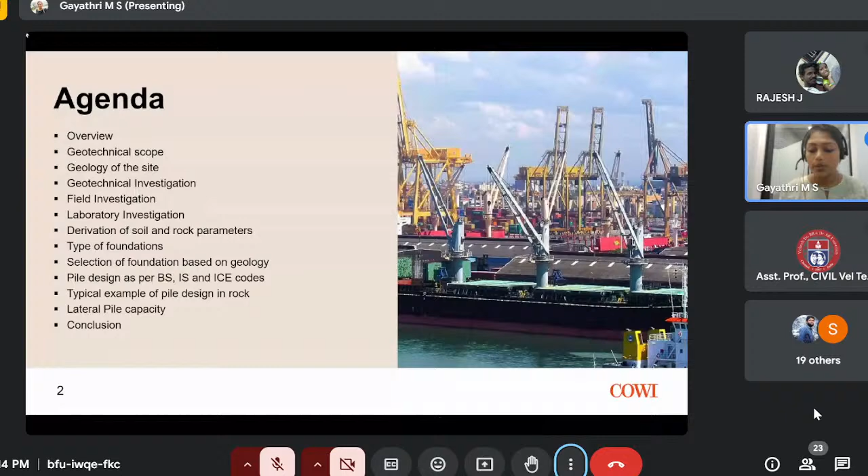Now we will have an overview of the project. This was an expansion of the Colombo Port. I worked on the West Container Terminal. The scope was to develop the container berth and associated marine works. The geotechnical investigation was conducted at selected locations to identify the subsoil condition. There were 15 boreholes: one was onshore, and 14 were offshore. The total length of the container terminal was 1,400 meters, out of which the container berth was 600 meters, and the rest 800 meters consisted of the long berthing structure along with the closing structures at the northern and southern sides. On the right, you can see the location of the boreholes conducted. This is the land borehole, and all these 14 boreholes are offshore boreholes.

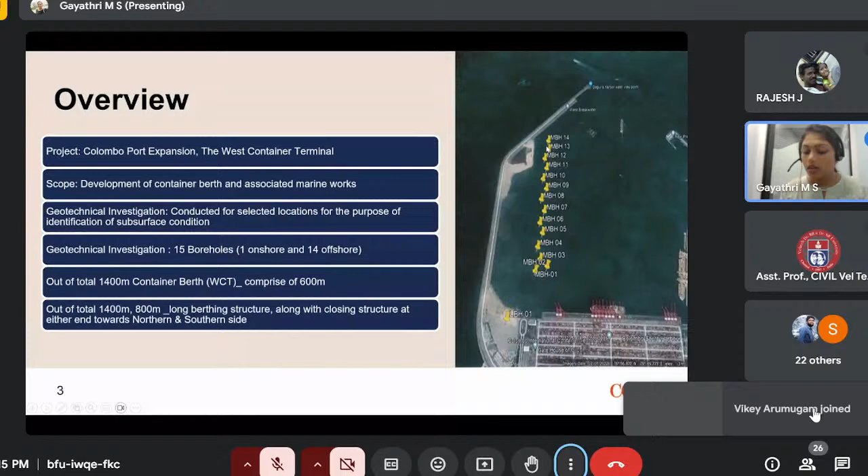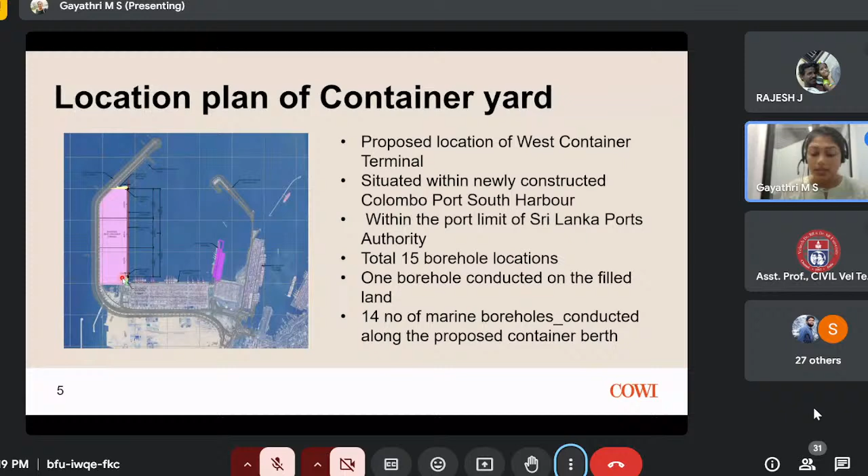Now we will come to the geotechnical scope. Initially, when starting work, we have a desk study - what data is available, what existing data is available. We study that and understand the geological conditions and previous designs, so we get an overall idea of the area, geology, and geotechnical investigation report. After the desk study, if we feel the number of boreholes conducted is less, we can propose additional boreholes. Once that is conducted, we receive the geotechnical investigation report, which contains the summary of all the laboratory and field data conducted, and all the borehole locations, everything.

It is a detailed report of the investigation done. From the investigation report, we will prepare a geotechnical interpretative report, which will be a summary of the investigation done, and from the summary we will interpret some data and derive some parameters useful for the design.

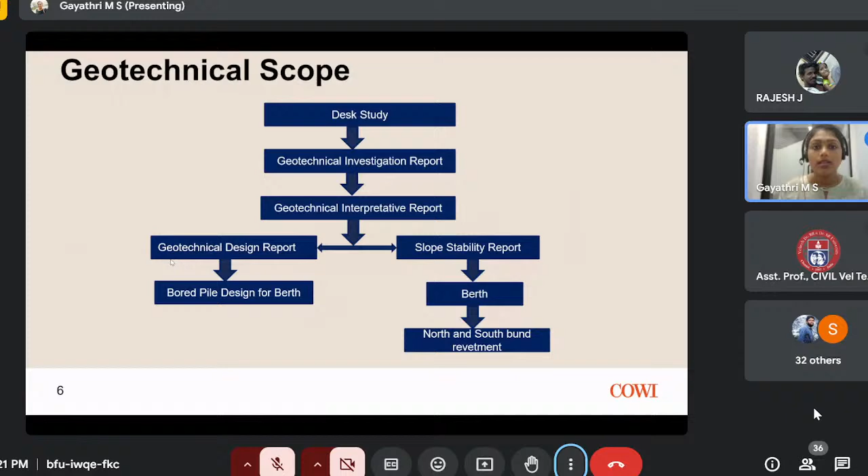So we will go in detail with the pile design in the coming slides. Now the geology of the site.

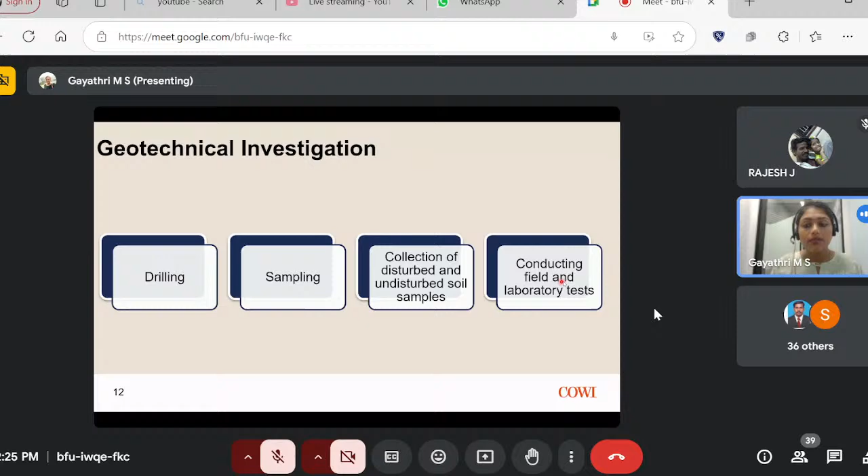Now, geotechnical investigation. We will see in detail what geotechnical investigation is and what they are doing in that. There will be drilling, sampling, and collection of the disturbed and undisturbed soil and rock samples, and conducting field and laboratory tests of the samples collected.

Coming to field investigation: the boreholes are advanced using a rotary drilling machine, and the drilling was carried out using overburden cutting tools, with the wash boring process used to remove the cuttings from the bottom of the borehole. The disturbed samples were taken at the corresponding depths where SPTs are done, and undisturbed samples are collected where cohesive soils are available or where N values are less than or equal to 6.

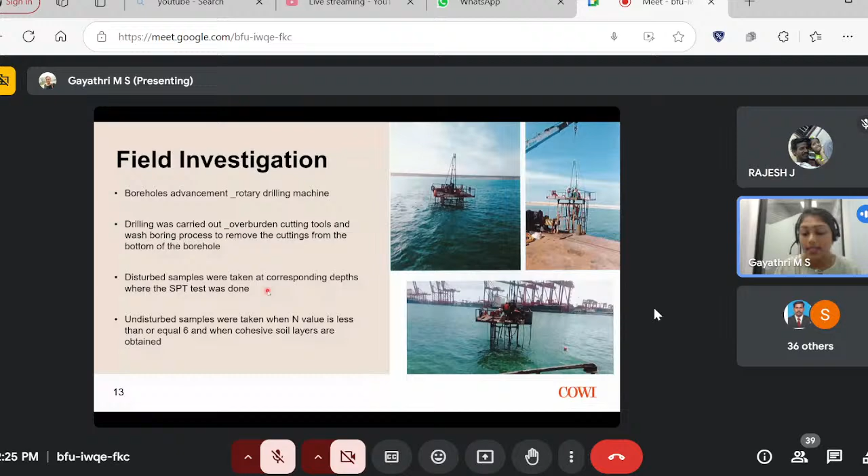Now the standard penetration test is done based on BS 1377. Since this is an international project, all the codes used for the design are based on Euro codes. Either the country's own codes or Euro codes, we follow.

The disturbed samples of soil were collected both from the SPT tube and cuttings collected from the washings. Triple tube core barrels were used for drilling in hard rock, and the rock cores were evaluated at the site using visual observations and CR and RQD parameters, which we will discuss in detail later.

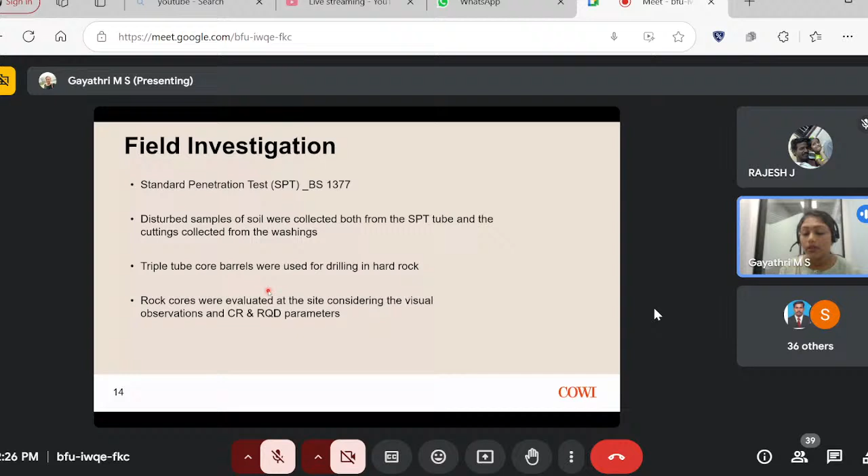Standard penetration test - I hope all of you know about the standard penetration test. The number of blows of the hammer required to drive each 150 mm will be counted. Each SPT N value will be the number of blows required for 300 mm penetration beyond a seating of 150 mm.

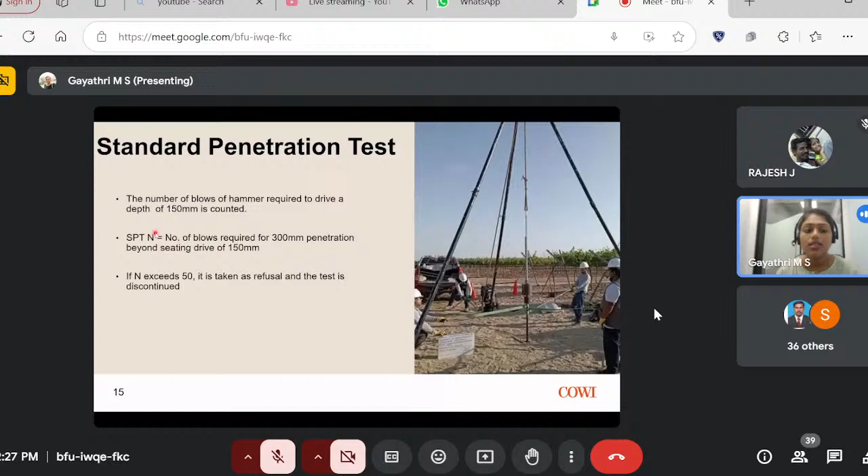If the SPT N value exceeds 50, it is considered a refusal and the test will be discontinued.

On the right side you can see the setup and the idea of SPT. Once the drilling is done to the desired depth, the drilling tool will be removed and the sampler will be placed inside the borehole. The standard split spoon sampler is used. The outer diameter of the sampler is 50 mm, the weight of the drop hammer is 63.5 kg, and the freefall height is 760 mm.

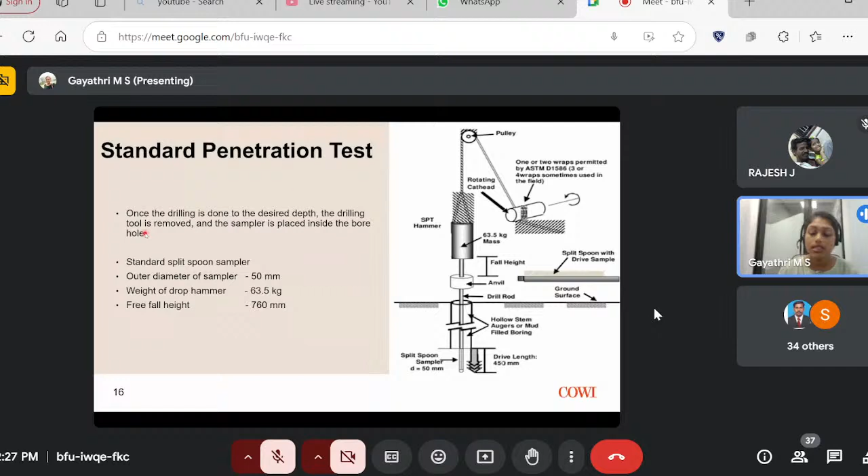Now, field bore log - most of you will be aware, I guess. It is a detailed record of the conditions and data gathered during the geotechnical exploration. This is created by recording the in situ ground conditions encountered in a borehole, done by visually inspecting the samples brought to the surface. A bore log will contain soil types, the water table, soil consistency, cohesive or non-cohesive nature, and permeability - all the data will be available in the field bore log.

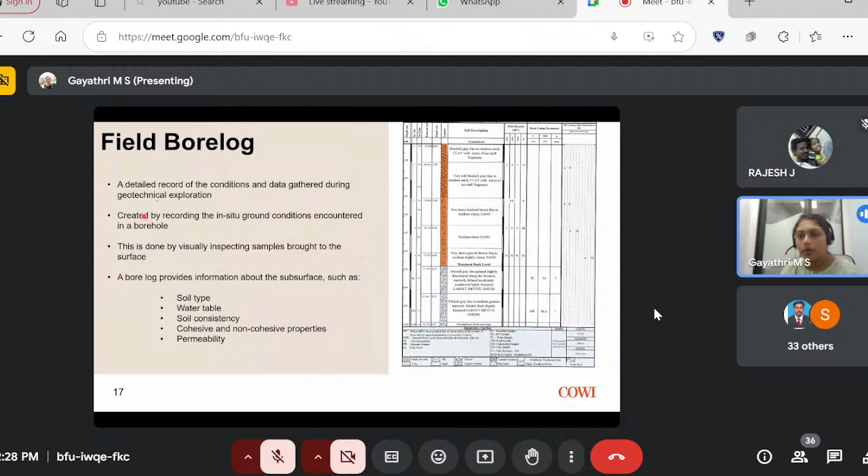Now this is a typical field bore log. I thought it would be helpful for you to understand how it actually looks like. It will have depth, all the depths, the elevations, all the soil descriptions, SPT N values. For soil, it will be SPT N values; in case of rock, it will be CR and RQD. So all the data will be available in the bore log.

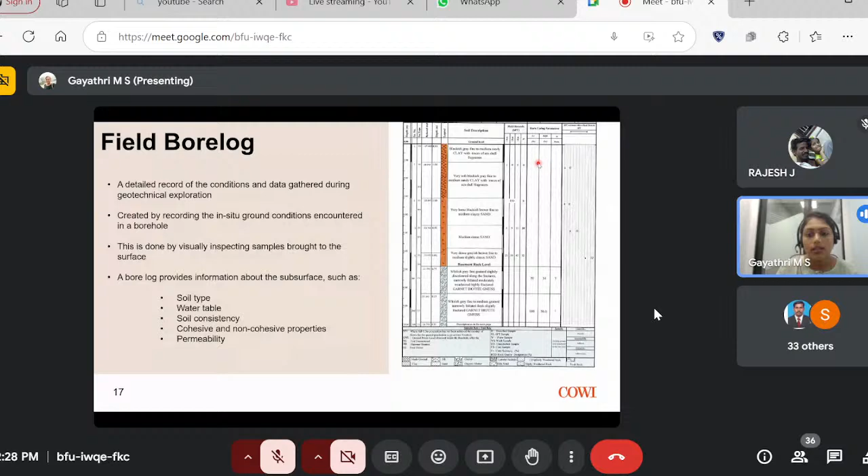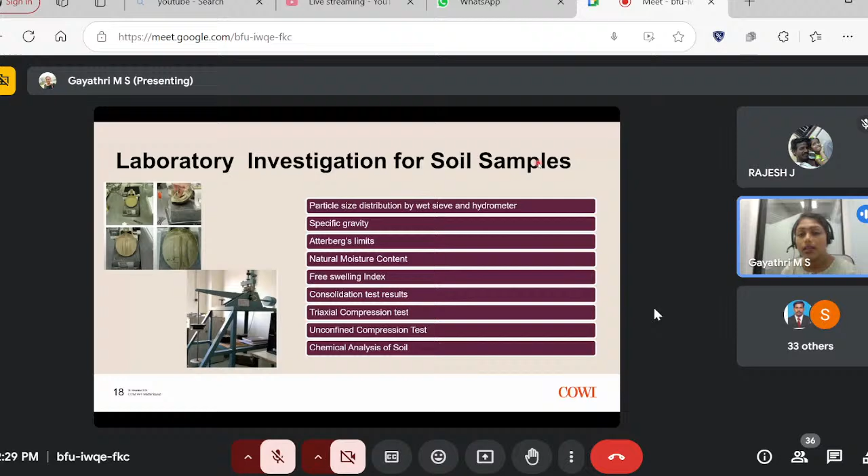Now, laboratory investigation for soil samples. What are the tests available for soil? These are particle size distribution, specific gravity, Atterberg limits, natural moisture content, free swelling index, consolidation test results, triaxial, unconfined compression test, and chemical analysis of soil.

Now, on rock samples, we have uniaxial compressive strength test, point load test, modulus of elasticity, porosity, specific gravity, and water absorption. This is a typical laboratory test result in which both soil and rock laboratory test results are available.

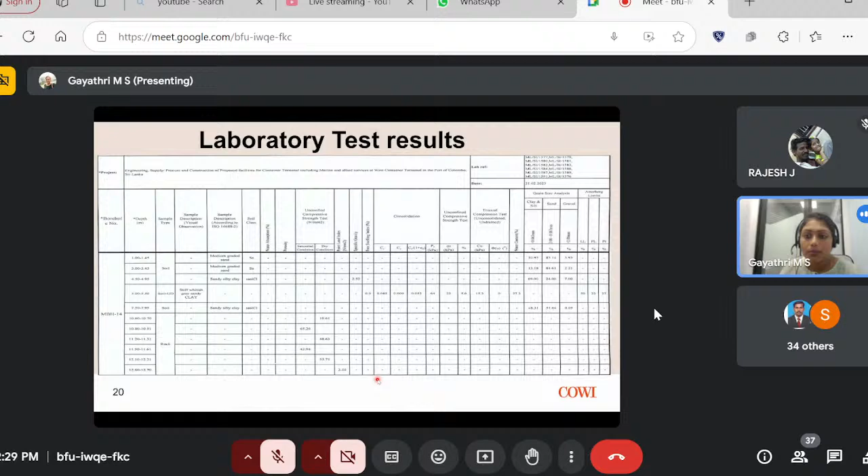So there is a grain size analysis, Atterberg limits for the clay soil, and the consolidation and other triaxial test results for the clay soil if available. In case of rock, we have UCS values, and sometimes other parameters also will be available, depending on the project.

Now we have gone through the geotechnical investigation. If we have the investigation report, as I told, we will prepare a geotechnical interpretative report. The main idea of the report is to come to the design parameters, to derive the design parameters. So, what are the design parameters?

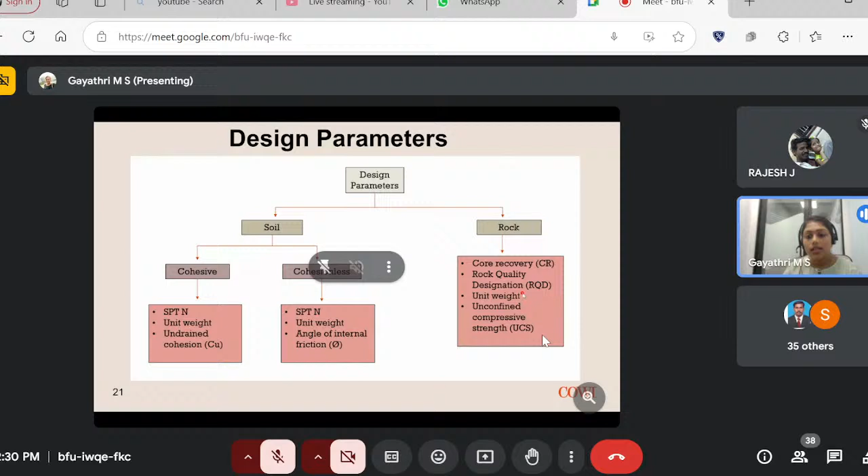We have both soil and rock. So what are the concerned design parameters for soil and rock? Soil has both cohesive and cohesionless soils. For cohesive soils: SPTN, unit weight, and undrained cohesion. For cohesionless soils: SPTN, unit weight, and angle of internal friction. In case of rock, it will be core recovery, then rock quality designation (RQD), unit weight, and unconfined compressive strength (UCS).

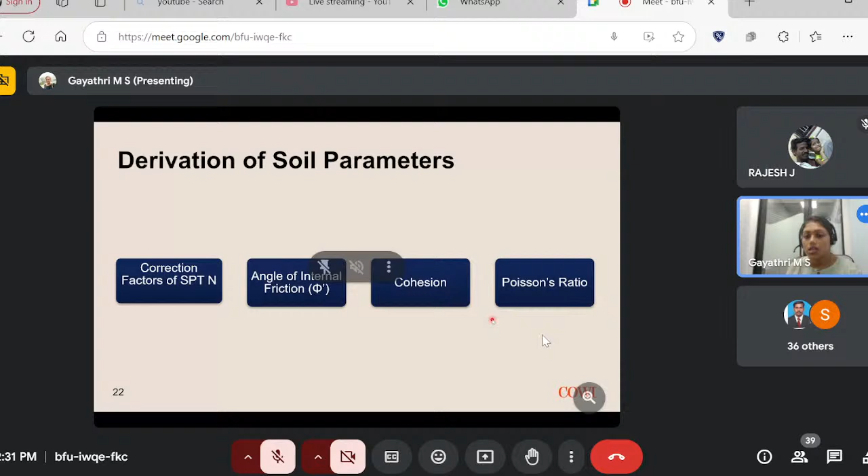Now, how to derive these soil parameters? First of all, we have the SPT, so the correction factors for SPTN, then angle of internal friction, cohesion, then Poisson's ratio. We will go one by one.

Correction factors for SPTN: this is as per J.E. Bowles. You can find the same in IS 1983 also. So we have two correction equations given. The N160 is for sands, mainly the penetration resistance corrected for both rod energy and for overburden pressure also. This overburden pressure correction will only be conducted for sand.

If it is clay, this overburden pressure correction is not required. So the N measured is the SPTN value measured at the site. Then CN will be the overburden pressure correction, which is used to calculate this equation. Then effective overburden pressure P naught. CE is the correction factor for energy. CB will be correction factor for borehole diameter. This is correction factor for sampling method, and CR is the correction factor for rod length.

Now the correction factors, what are the correction factors and their values? Everything is tabled here. You can find it in the textbook or the code that I have mentioned.

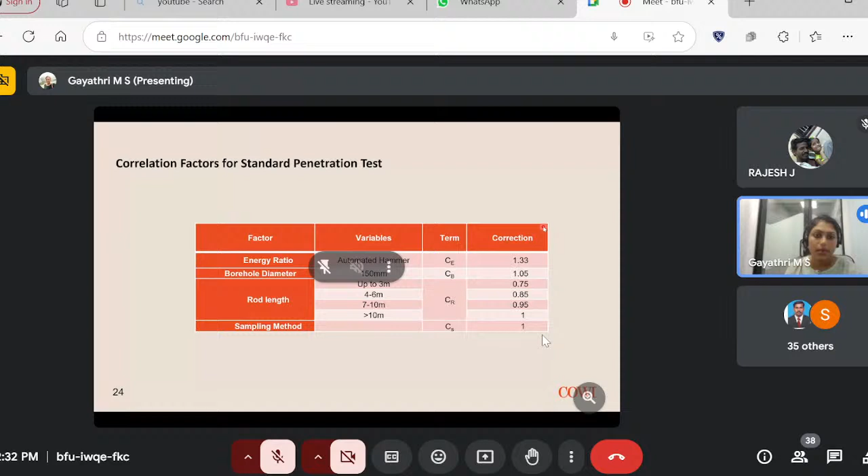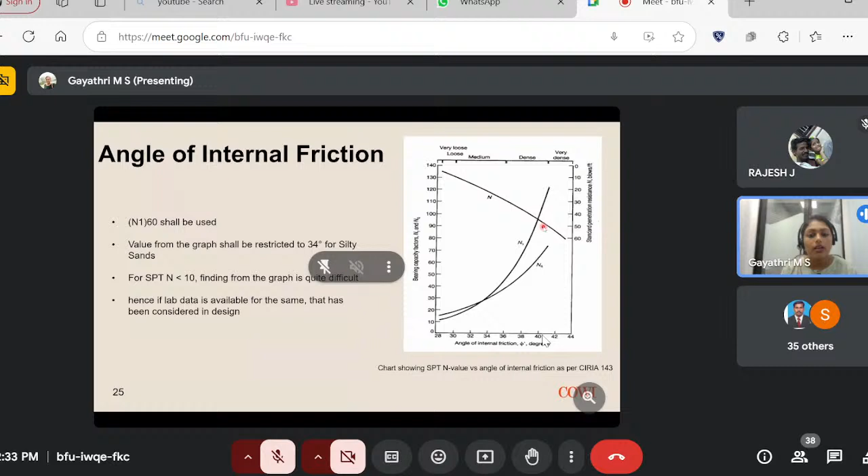Now the next one is angle of internal friction. To derive the angle of internal friction, which is a cohesionless soil property, N160 is used. The values available from the graph will be restricted to 34 degrees for silty sands. This is based on past experience and past projects in the same similar region. Based on that, we have come to that conclusion. For SPTN less than 10, it is difficult to find it from the graph. Hence, if lab data is available for the same, that can be considered in the design.

Now, next is cohesion. This undrained shear strength is derived based on the corrected SPT value. Here we will use N60. We don't need overburden pressure correction here. So as per CIRIA report 143, CU will be 5 times the N60. Whenever lab data are available, the same can be considered for the design.

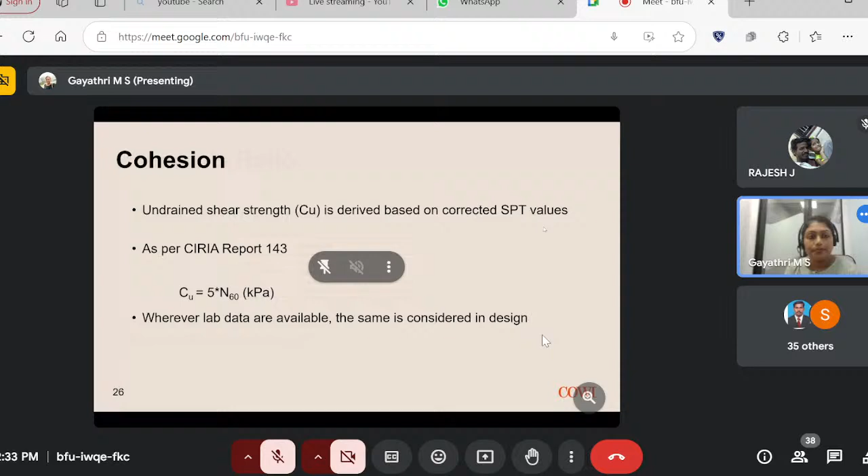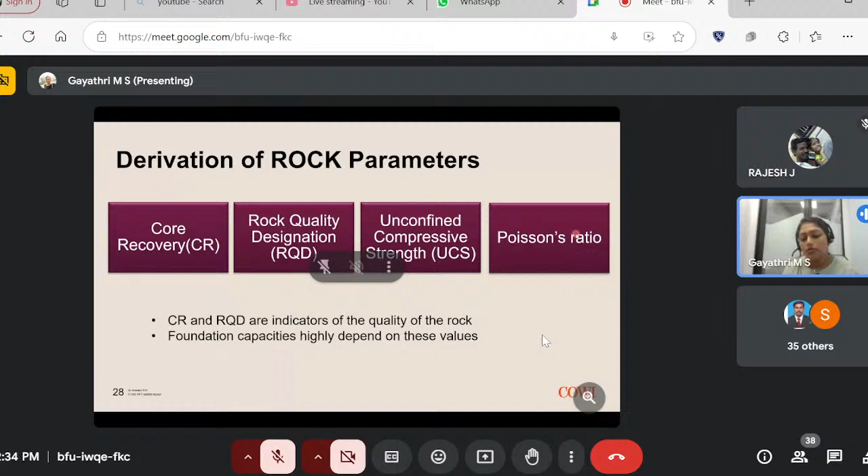Now, derivation of the rock parameters. The parameters are core recovery, rock quality designation, unconfined compressive strength, Poisson's ratio. This is CR and RQD. These are the indicators of the quality of rock, and foundation capacity is highly dependent on these values, which are very important for the design.

Now, what is core recovery? Core recovery is the percentage of the drilled rock that is recovered as a core in rock core drilling. It is calculated by dividing the length of the recovered core by the total length of the core run. Core recovery is also an indication of the condition of the rock. Low core recovery indicates poor rock quality, while a consistent core recovery of 100% indicates good quality rock.

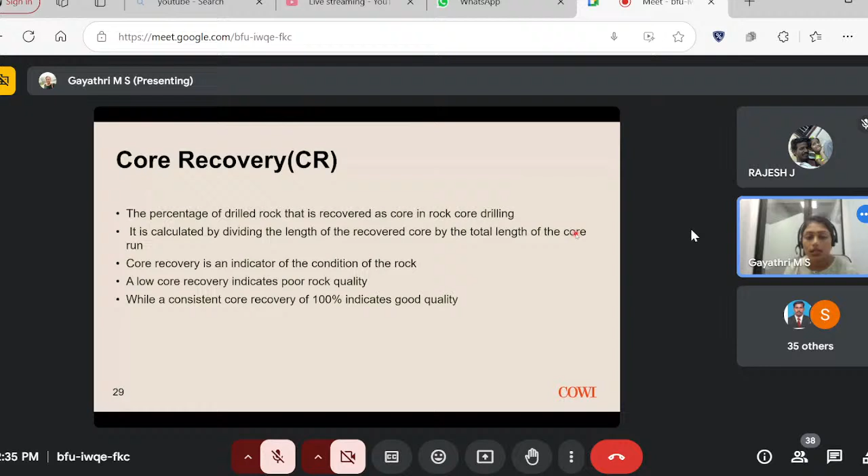Rock quality designation, RQD, is the percentage of drill core pieces which are longer than 10 centimeters in length, measured along the center line of the core. RQD is used to assess the quality and integrity of the rock mass, and is a rough measure of the degree of jointing and fracture in the rock mass. If RQD is more than 75%, it is a high quality rock, and if it is less than 50%, it is a low quality rock generally.

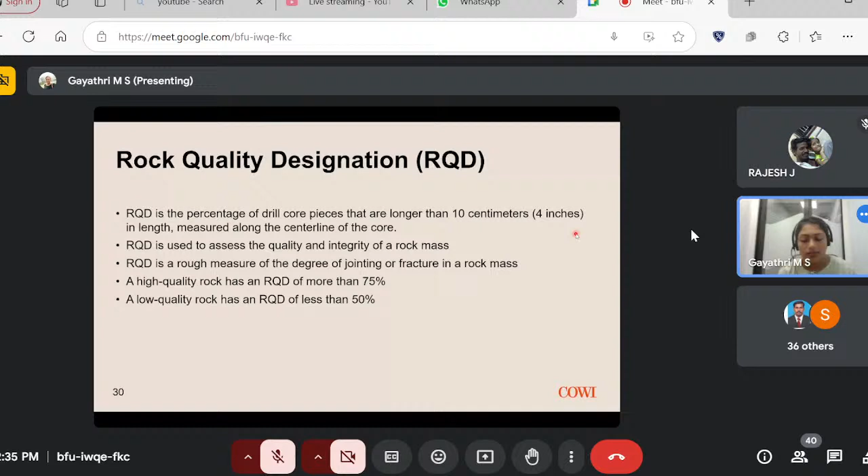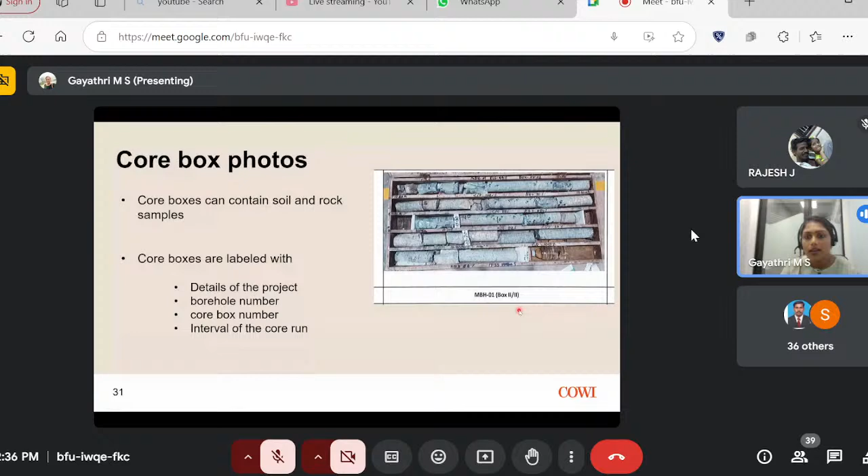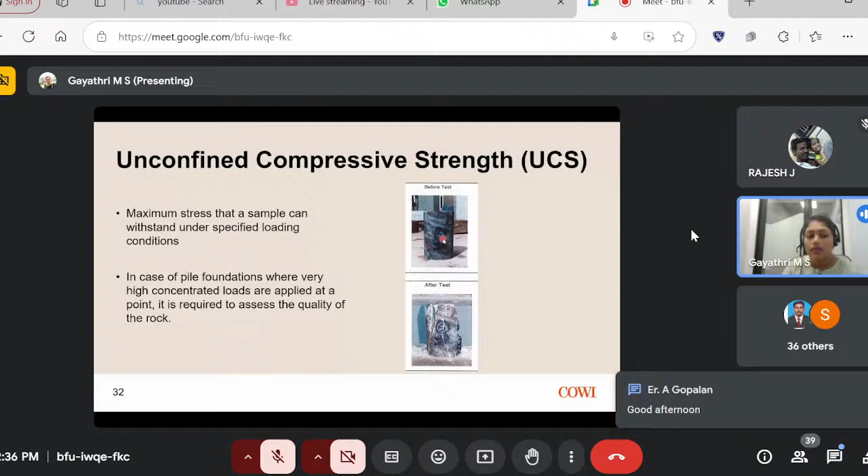Unconfined compressive strength, UCS, is the maximum stress that a sample can withstand under a specified loading. In case of pile foundations, where very concentrated loads are applied at a point, this parameter helps to assess the quality of the rock.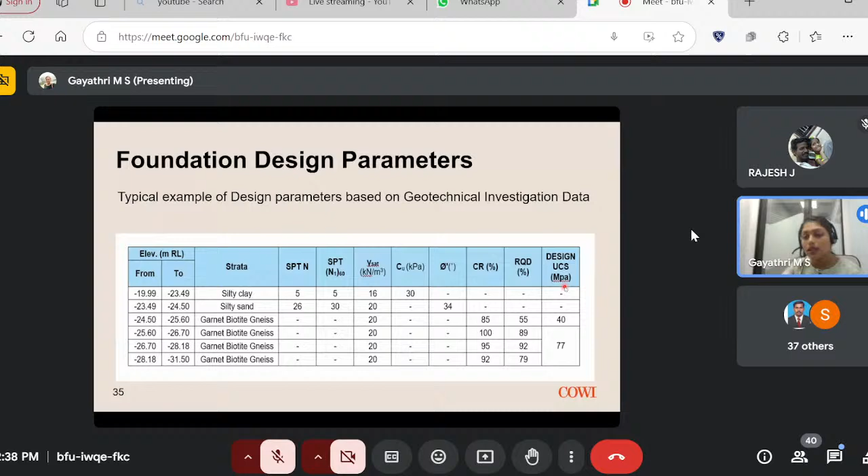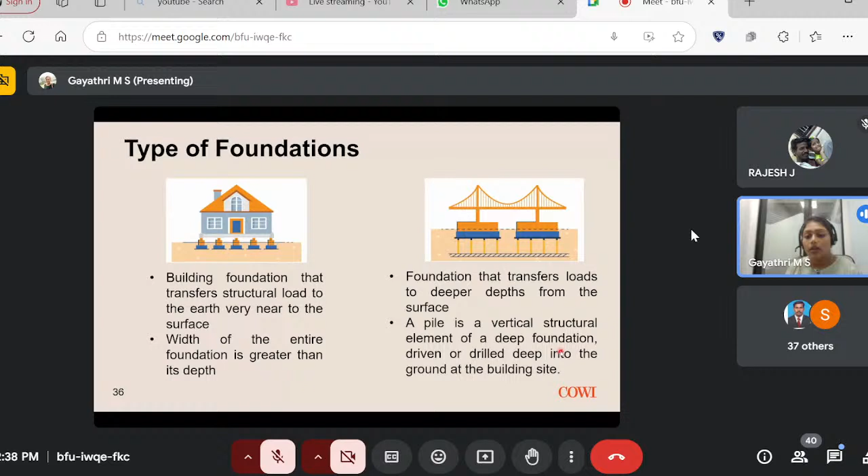Now, what are the types of foundations available? There are two types: shallow and deep. Shallow foundations are for buildings that transfer structural load to a strata very near the surface, and the width of the foundation will be greater than its depth. Deep foundations transfer load to deeper depths from the surface. A pile is one type of deep foundation, a vertical structural element that can be driven or drilled deep into the ground at the building site.

Now, how do we select a foundation? What are the things we need to keep in mind while selecting a foundation? The characteristics of the soil, presence of groundwater table, magnitude of the imposed loads, and project characteristics. Sometimes there will be employer requirements that we should go with a particular type of foundation, and the selection of the foundation should not only be based on safety, but also should be economical.

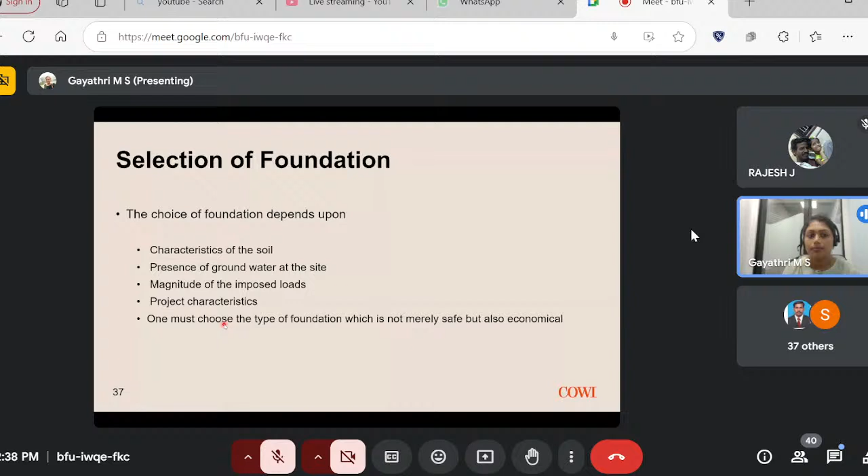Selection of foundation: in this project we mainly went with the pile foundation. Why didn't we go for a shallow foundation? In the field, the SPT N values available are very low, and the soil is subjected to liquefaction, and the subsoil strata present is not able to meet the requirements. That's why we went with a pile foundation. Since the rock is of good RQD and the UCS values available are very good, that indicates high quality rock.

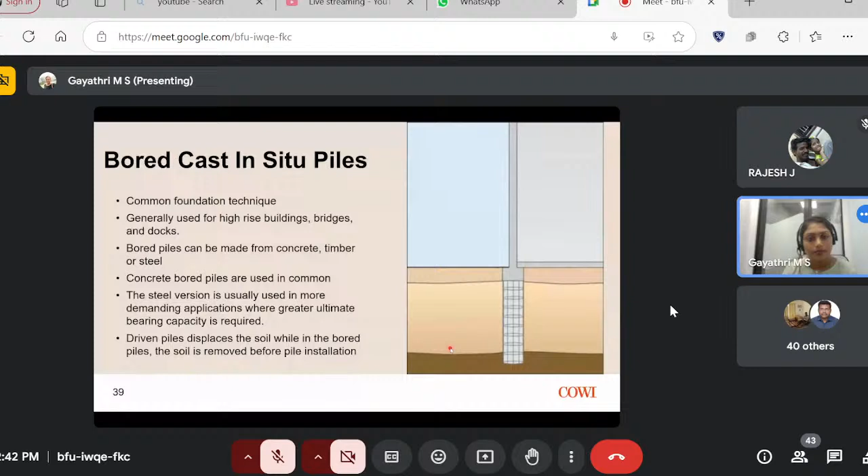Now, what are the challenges in installing a bored pile? Defects can occur at any point during construction. It takes skilled labor to install them properly, which drives up the overall price of the project. The most common types of pile integrity issues are the presence of voids, inconsistency in concrete mix, trapped groundwater or slurry, and geometric errors.

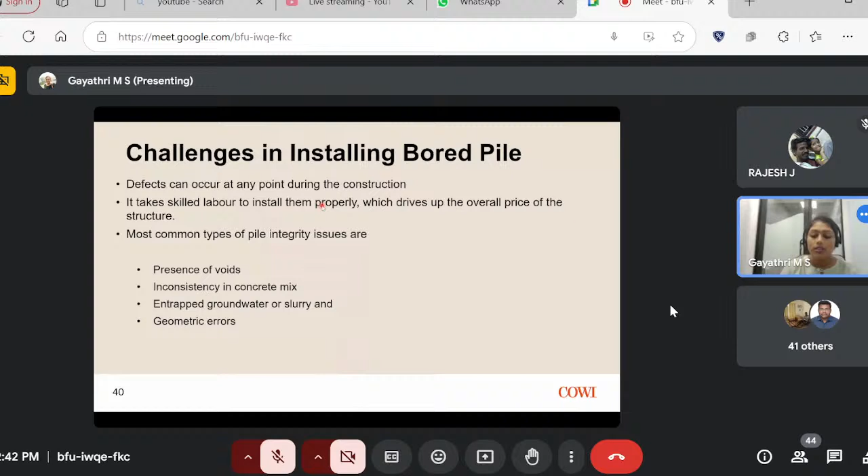What are the advantages? Excellent resistance against corrosion and strong winds, ability to withstand active tectonic forces, can be installed in most any kind of weather conditions, less disruptive to the surrounding ground and buildings, and offers good load bearing capacity, used to support large structures.

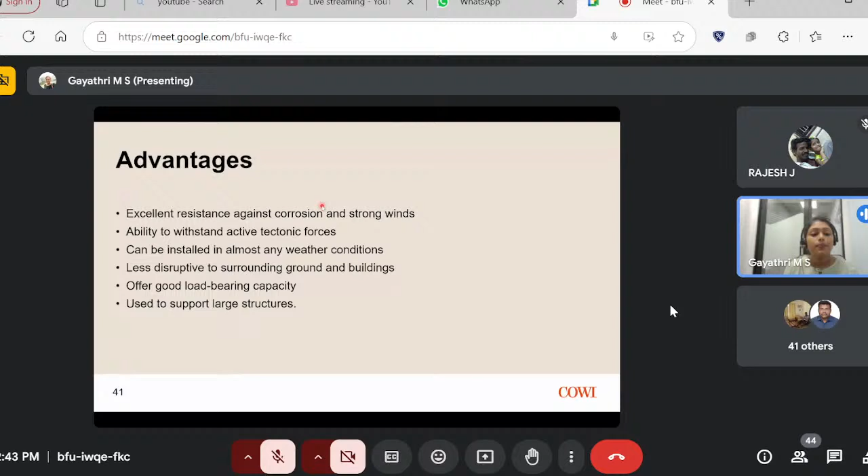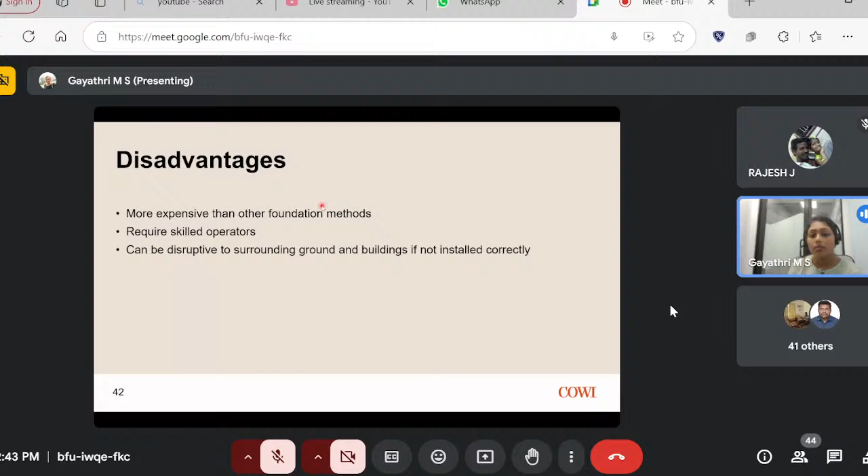Disadvantages: this is more expensive than other foundation methods. It requires skilled operators and can be disruptive to the surrounding ground and buildings if not installed properly. That is why we need skilled laborers.

Vertical pile capacity. Now we will dive into the pile capacity and pile capacity calculations. So the pile capacity is the resistance of the soil to the loads, which is applied in the direction of the vertical axis.

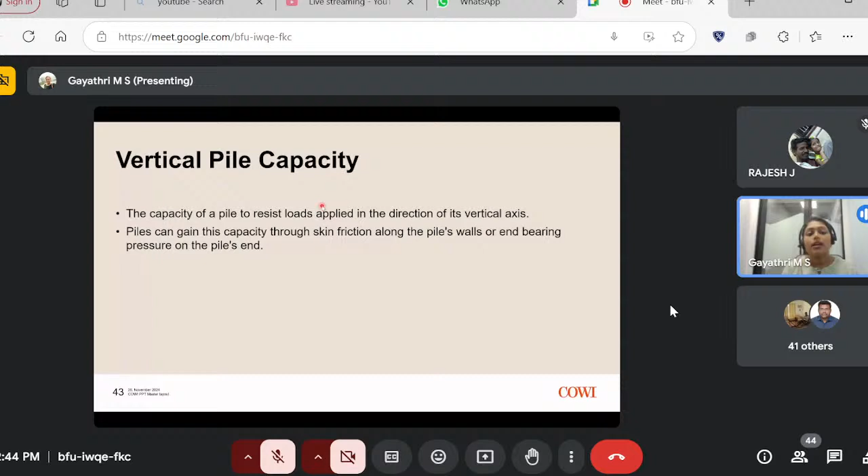Piles can gain this capacity through skin friction along the pile walls. This skin friction acts along the length of the pile, and bearing pressure acts on the pile end.

Skin friction is caused by the relative movement of the pile and soil. The interface between the pile and soil will develop and mobilize skin friction. It acts in the upward direction along the pile, and equal and opposite forces act on the surrounding soil.

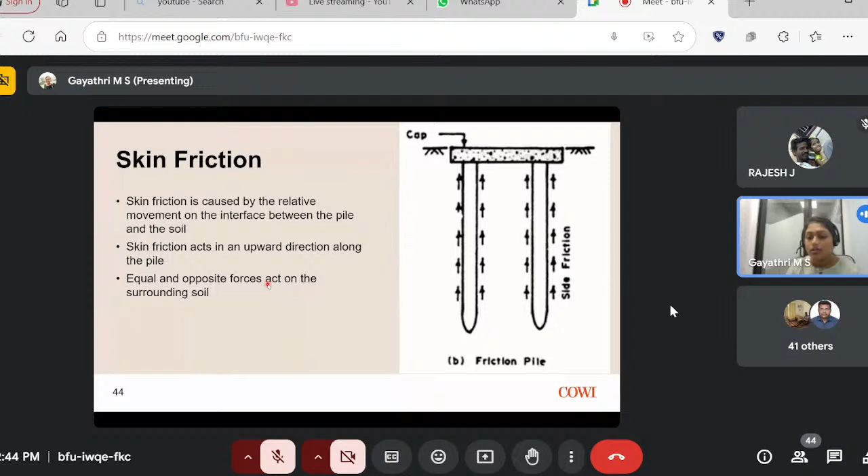End bearing: the bottom end of the pile rests on a hard strata, a stronger layer. The loads from the superstructure are directly transferred to the hard soil through the bearing action of the bottom tip of the pile.

Now in this presentation, we are discussing the pile design based on IRC code, BS code, and ICE manual. First of all, we'll go with IRC 78, but in this project we haven't considered IRC 78.

The ultimate capacity of a pile socketed into rock is obtained by ultimate end bearing and ultimate side socket shear. The allowable capacity of the pile is obtained by dividing it with the factor of safety. The ultimate end bearing is divided with a factor of 3, and the ultimate side socket shear is divided with a factor of 6. Now the ultimate end bearing and the ultimate side socket shear are calculated using this.

KSP is an empirical coefficient. The values range from 0.3 to 1.2, based on the CR plus RQD divided by 2 value. So for the corresponding location, we need to find the corresponding CR and RQD values.

QC is the average unconfined compressive strength of the rock below the base of the pile, for twice the diameter or least lateral dimension of the pile. So that is end bearing.

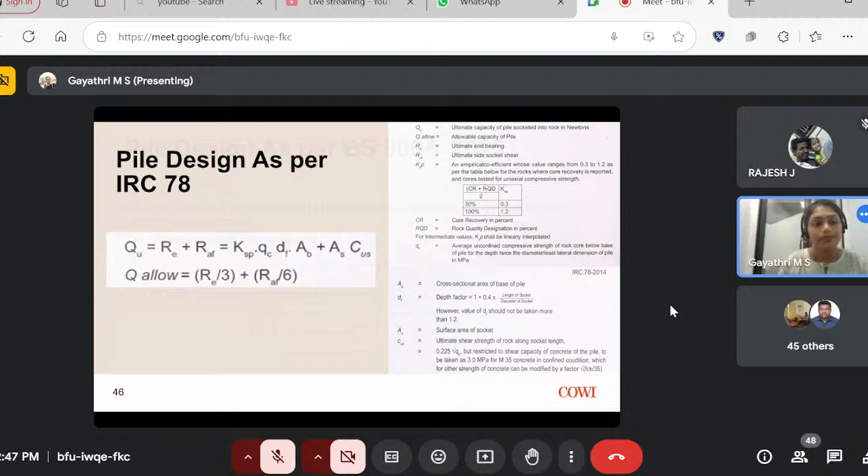Now pile design as per BS 8004 2015. The resistance of a pile foundation in rock depends on the roughness of that rock socket. The ultimate unit skin resistance is calculated by the equation: QS equals K1 times P reference times Qu divided by P reference, raised to K2.

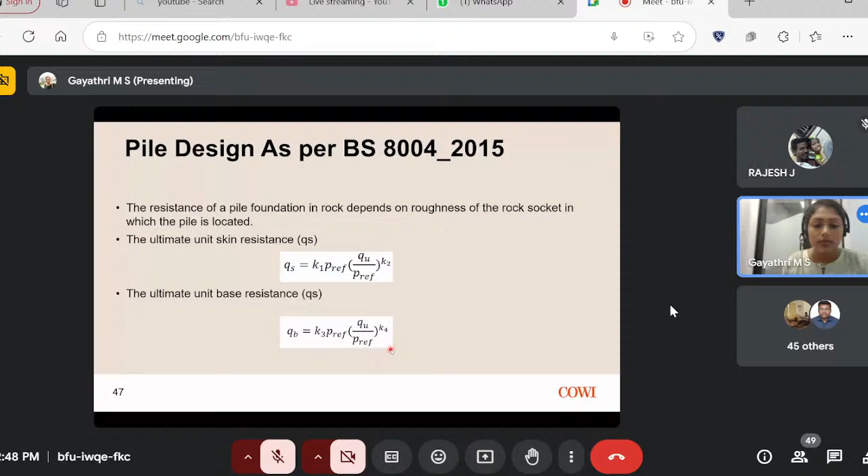Now the ultimate unit base resistance is calculated by the equation given below. The K1, K2, K3, K4 parameters are empirical coefficients that depend upon the rock and pile type. P reference is the atmospheric pressure, assumed as 100 kPa. Qu is the unconfined compressive strength of the rock. This table gives the coefficients K1, K2, K3, K4, and based on this table we have considered the value.

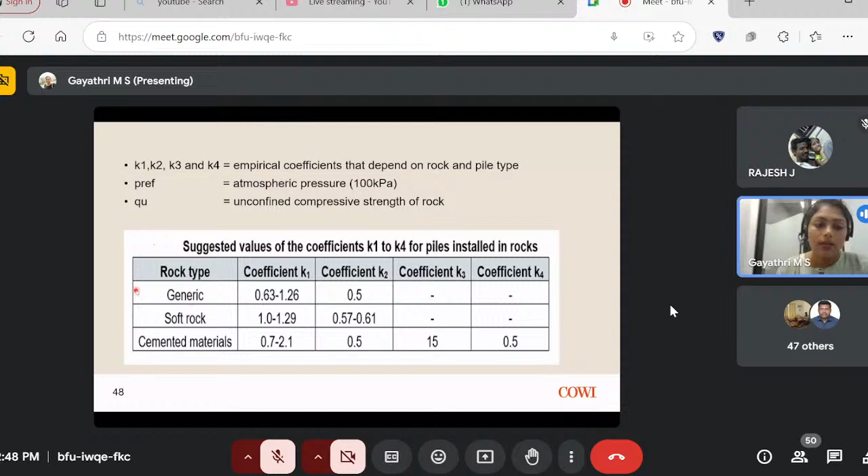Now pile design as per ICE manual C54. The ultimate skin friction for piles socketed in rock is calculated based on the empirical equation by Horvath and Kenney: QS equals 0.2 root UCS, and the ultimate end bearing resistance is equal to the UCS which is available.

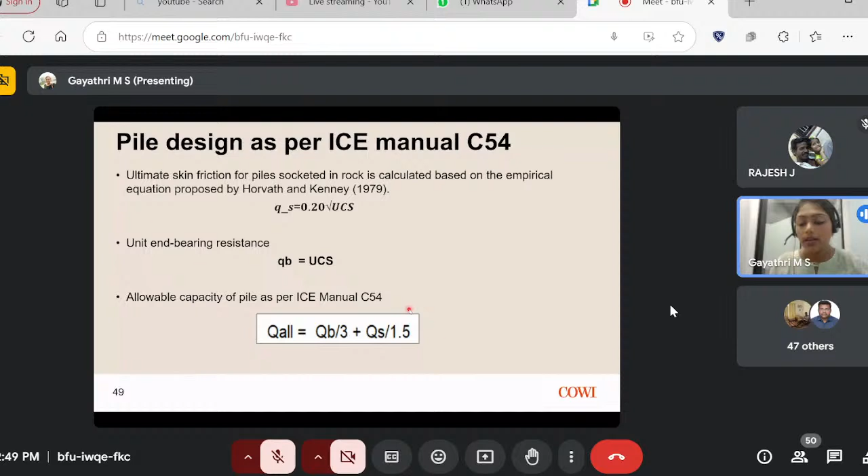Allowable capacity as per ICE manual: the ultimate bearing value will be divided by 3, and the ultimate skin resistance will be divided by 1.5. So for ICE manual, on shaft we use 1.5, on base we use 3, usually with working pile load test.

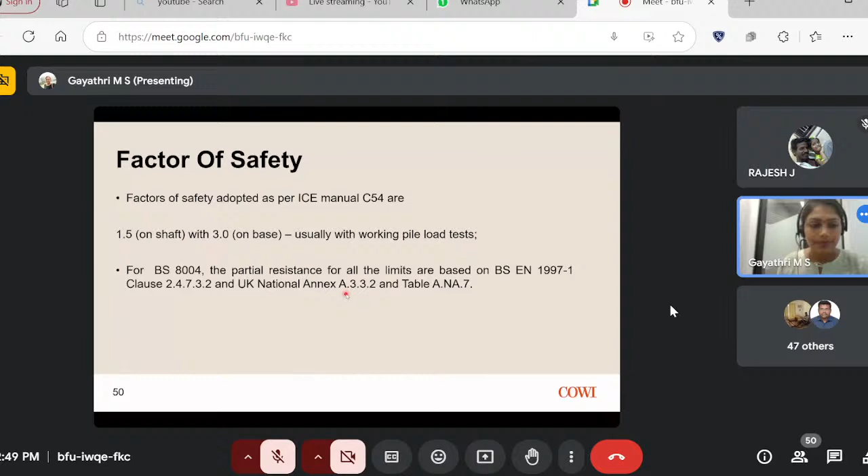In case of BS 8004, the partial resistance of all limits are based on BS EN 1997, the Euro code and UK national annex. This table gives the partial resistance factors for BS 8004.

In this case, these are the different kinds of loadings. So ULS STR GEO DA1 C2 was the critical case. The factors considered are 1.7 and 1.4 for base resistance. These factors are multiplied by a model factor, this 1.4 available as per the Euro code, and the factor of safety is obtained like this.

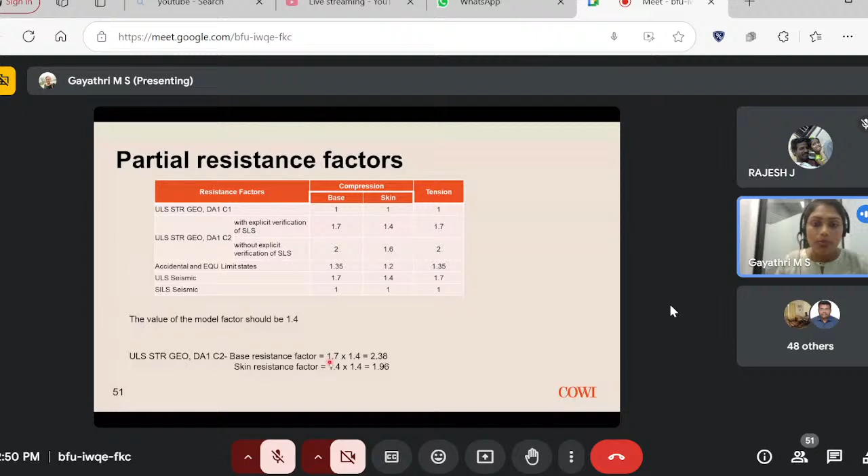Now we will go with the typical pile capacity calculation.

Is the screen visible? Yes, yes, it's visible. Okay, okay.

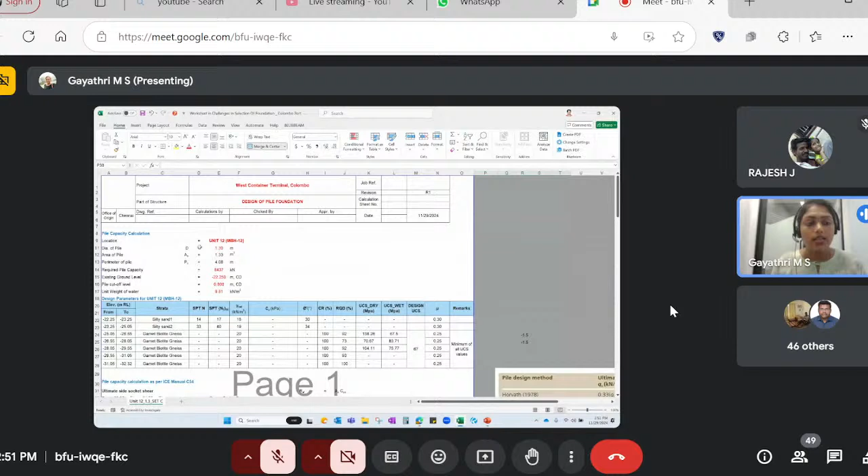So this is a typical pile capacity calculation sheet. It will have all the data of the location, the diameter of the pile, and required pile capacity, what is the existing ground level, what is the pile cutoff level, and the design parameters for that corresponding location.

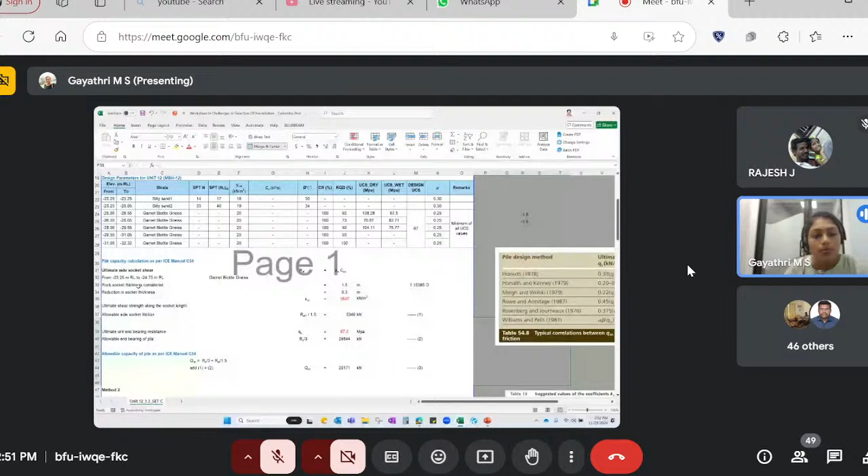First of all, we will go with pile capacity as per ICE manual. The side socket shear, as told before, is calculated using this equation. The corresponding values are calculated based on that equation, and the available values are divided with the factor of safety, and ultimate end bearing resistance is equal to UCS divided by the factor of safety to obtain the allowable capacity of the pile.

Now the second method is BS8004. Finding out the required socket length is a trial and error process. You need to play with the socket lengths to come to a conclusion, which is what we are going to recommend. So for both methods, I found out a value and whichever is giving minimum value, that I have considered.

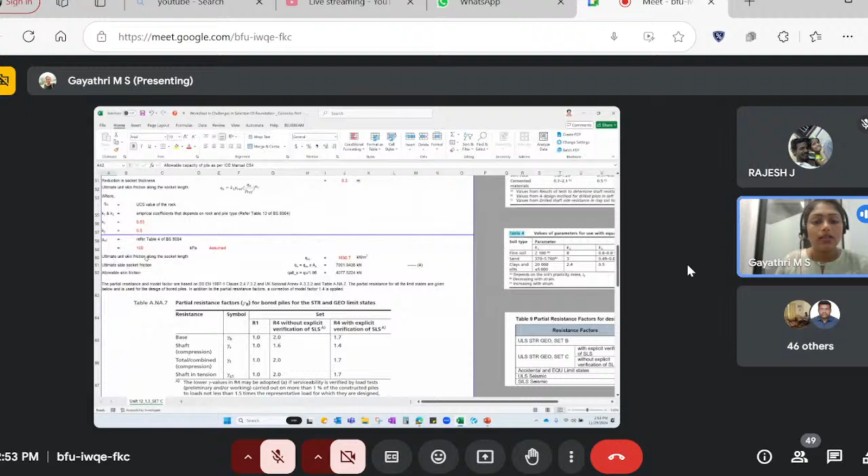So for BS8004, the skin friction resistance is calculated using this equation, and all the factors used are mentioned here. Similarly, this is the table of partial resistance factors mentioned before, and this is the unit end bearing equation, where K3, K4 parameters are used as mentioned before, and finally from the ultimate values, by dividing with the factor of safety, we will come to an allowable safe pile capacity.

And finally, the allowable safe pile capacity will be the minimum of the two available. From that, we will recommend pile capacity based on the requirement, and the socket length, pile, and bearing strata, everything will be mentioned.

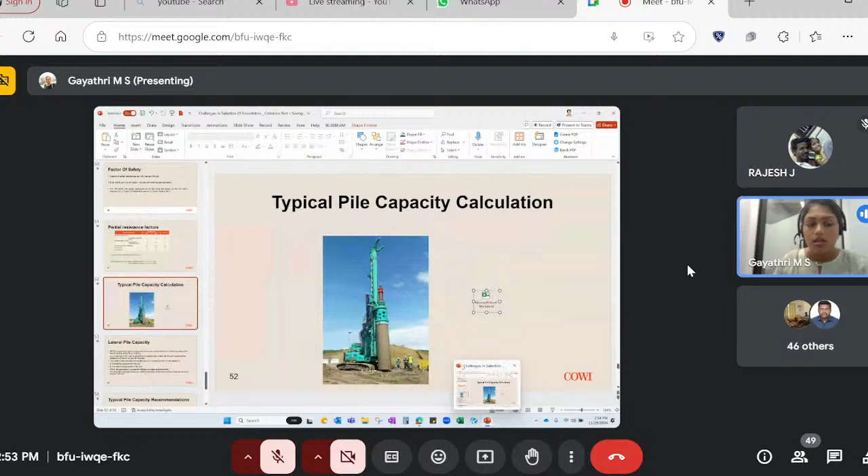Now coming back to the presentation. Now, lateral pile capacity. Till now, we have discussed the vertical pile capacity. Similarly, there are codes and empirical equations for the lateral pile capacity also.

But currently in industries, people are using software. Even for vertical pile capacity, there are softwares, and different consultancies have different approaches towards the calculations. So lateral pile capacity is mainly calculated using LPILE. It is a special purpose program based on rational procedures for analyzing piles under lateral loading.

This uses the PY method. PY curves are the tool used in geotechnical engineering to estimate how soil resists the lateral forces or lateral load on the structure. This method assumes that the soil resistance is a nonlinear function of the pile deflection.

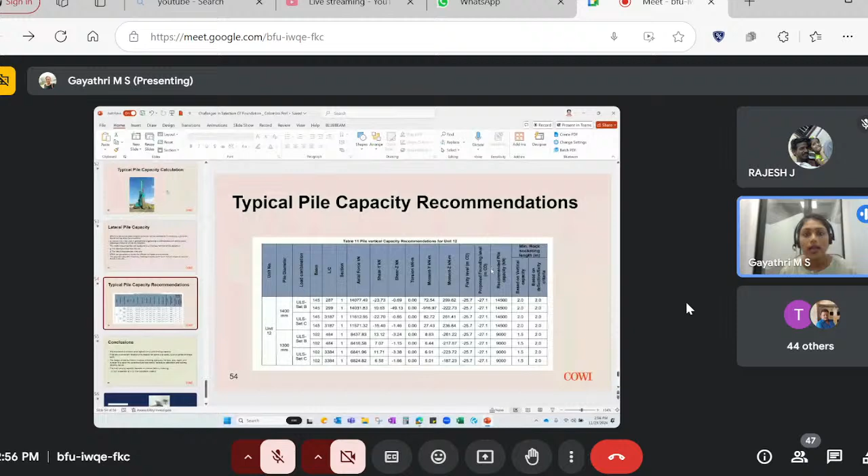In some cases, most of the cases, vertical pile capacity will be governing, but in some cases, the lateral pile capacity will be governing. So in the software, we will have a rotation check and the deflection, bending moment, shear force - all these values we will check whether they are within the limits. If they are not, then we have to increase the socket length. So whichever is governing, based on that we provide the recommendation.

Now, coming to the conclusions. The pile foundation is chosen when topsoil has poor bearing capacity. Piles are a convenient method of foundation for works like works over water, such as jetties, bridge piers, etc. The design of pile foundation involves providing adequate pile type, size, depth, and number to support the superstructure load without excessive settlement and bearing capacity failure. And pile load carrying capacity depends on various factors like soil properties and pile installation method.

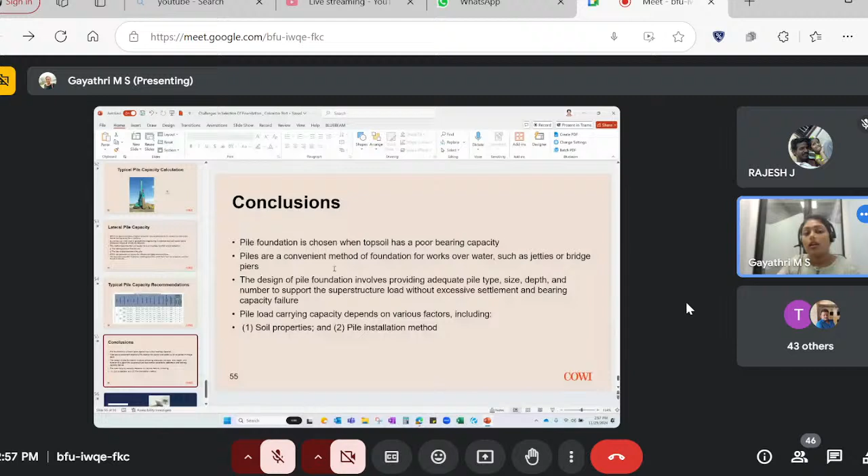That's it, that's the conclusion. Thank you, that's all.